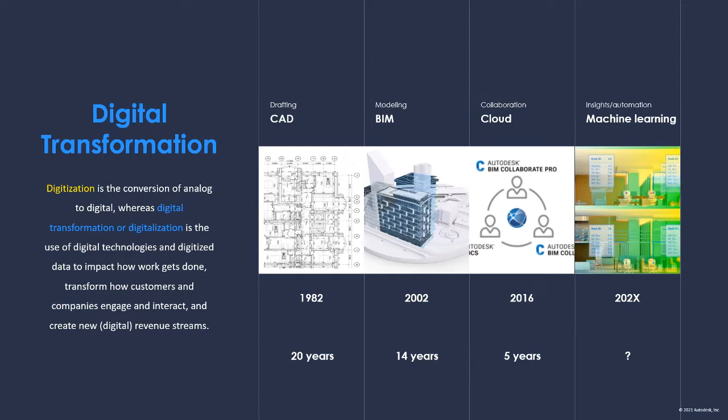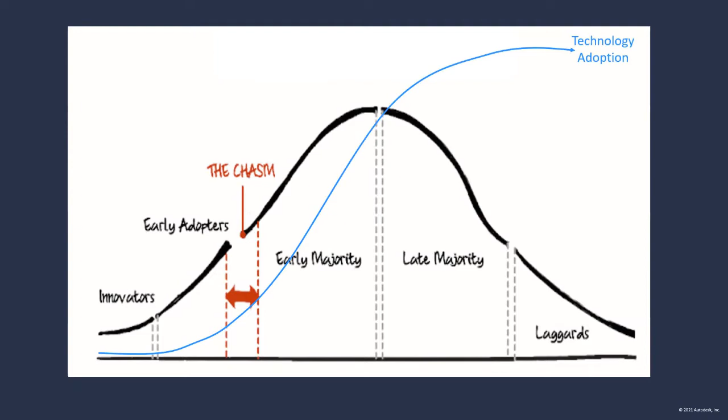You can see the blue chart that represents that curve. First, the technology is introduced, then there is a catalyst, and then it accelerates until it reaches a plateau of productivity. And this plateau, we've experienced it a few times, as I talked about.

And the catalysts were different. For CAD, the catalyst for the acceleration was personal computers. For BIM, the catalyst was really 2 things: downturn, because what happened in the years 2008, 2009, 25% of the AEC industry was out of work. So during that time, a lot of professionals learned BIM and started to use it after the recession when things were better. But also with mandates - public and private owners, so governments and private owners, started to mandate the use of BIM. They said, I want a BIM project. And the goal at the time was really to be on time and on budget.

For the third digital transformation, which is the cloud, no surprise here - the cloud was accelerated by COVID. COVID was the catalyst for this complete transformation. Today I can tell you from what I see with the Autodesk products, there's a very large majority of the industry that transitioned to the cloud.

The other interesting thing is if you look at the duration of these transformations, the first one took 20 years, then the second one 14 years, then 6 years, because we can say that we already transitioned. So there's also an acceleration of when these transformations happen.

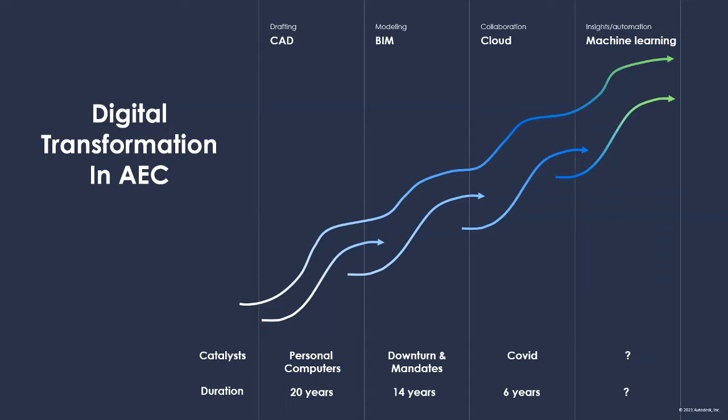The other nice thing about the transformations in AEC is that they build on top of each other. CAD is still a big part of the BIM process, and you cannot do cloud collaboration without BIM. The next transformation that will be about getting better insights and automation will need data, and the data will be created with BIM, with CAD, and it's going to be shared with the cloud. So it's interesting that you see that the value builds as we go through multiple transformations in the AEC industry.

So the question is, what will be the next disruption? When will it start? And who's going to be the driver or catalyst of this transformation in AEC? It's a lot of questions, and I don't have a crystal ball, but I can share with you some of what we think at Autodesk about this next transformation.

So in order to understand what the next catalyst is, we need to look at the bigger trends. In our industry, whether you design and build a building, a plant, a bridge, or a road, there are two big categories of drivers. The first one is demand. And globally, the demand will just be enormous in the next several decades.

It's driven by urbanization. Even though COVID slowed down people moving to cities, the longer term trend remains solid. A lot of the population will move to cities, reaching close to 70% of the population living in cities by 2050. The population is also growing from 7.5 billion to 10 billion by 2050.

And then there's post-COVID. We need to reconfigure the entire built environment. We need to make it safer. We need to be proactive in case there's another pandemic in the future. And the number of natural disasters keeps increasing, so there's more flooding, more earthquakes, more fire. All of that is going to create demand to build or reconfigure the existing built environment.

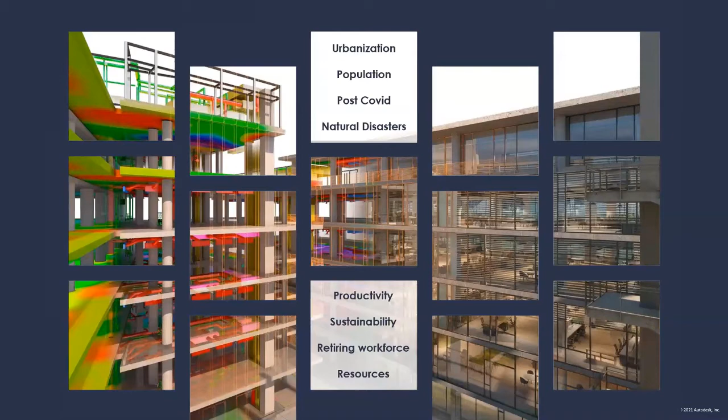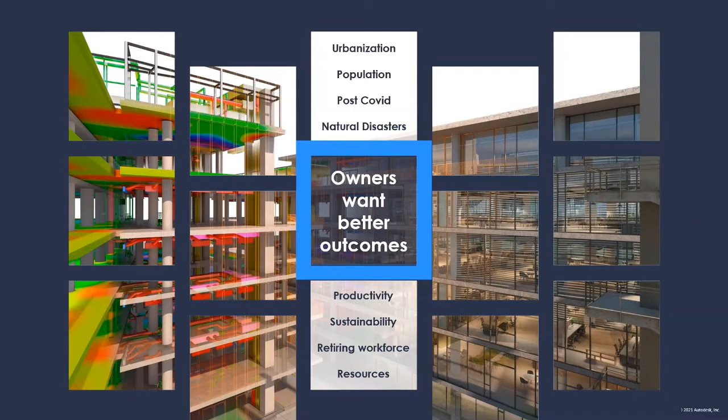So when you look at all of these forces, they will be a catalyst of change. To me, what's going to drive the next transformation is owners—whether public owners like governments, or private owners—they will want better outcomes because the demand will be big and we need to do better, be more productive, and design and build assets that perform in a much better way.

And we started to see it. We started to see governments around the world mandating the use of BIM. In the US, for instance, the GSA is already requiring BIM for facility management. The Internet of Things is exploding with billions and billions of data points, and owners are now part of some of the top trends in terms of smart spaces and smart buildings. All of that is just going to accelerate the next digital transformation.

Because the total cost of ownership for an owner is really in the operation phase—it's post-construction. 70% of the cost of ownership happens post-construction. So the way owners think about the lifecycle is around the design, the construction, which is the capital project phase, but also the operations.

What they will want in the future is to monitor what's happening during the operation phase and use all of these insights for planning purposes, to either reconfigure existing assets or build new ones. They want to learn from the past or existing assets in order to better design new facilities and new assets. So that white part of the lifecycle becomes critical for owners, and that part will drive the transformation.

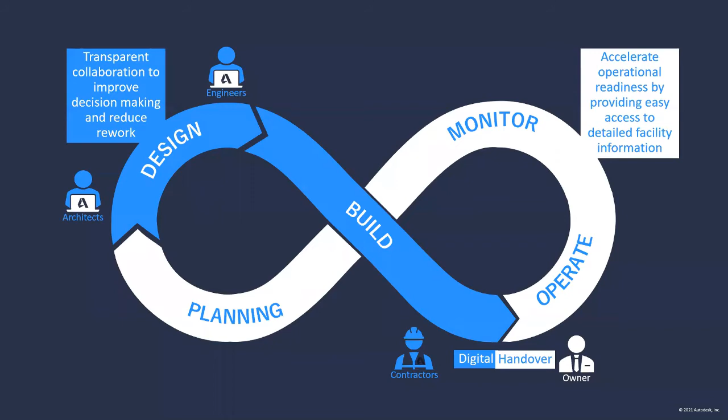So what is a digital twin? A digital twin is a digital replica of a built asset - a dynamic digital reflection of its physical self. Digital twins possess the operational and behavioral awareness necessary to simulate, predict, and inform decisions based on real-world conditions. I'm going to show you some examples of that.

At Autodesk University, we announced Autodesk Tandem, a new solution currently in beta. Autodesk Tandem is a digital hub that integrates with new and existing systems to connect the digital model to the operational and performance data of its physical counterpart. It's a powerful tool that integrates the rich information created during design and construction and transforms it into a holistic view of the project.

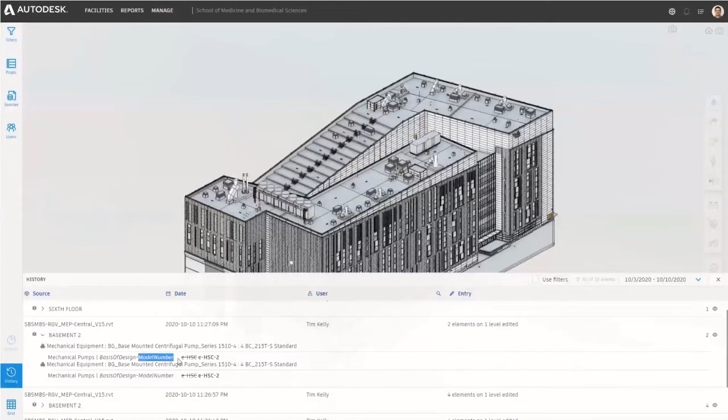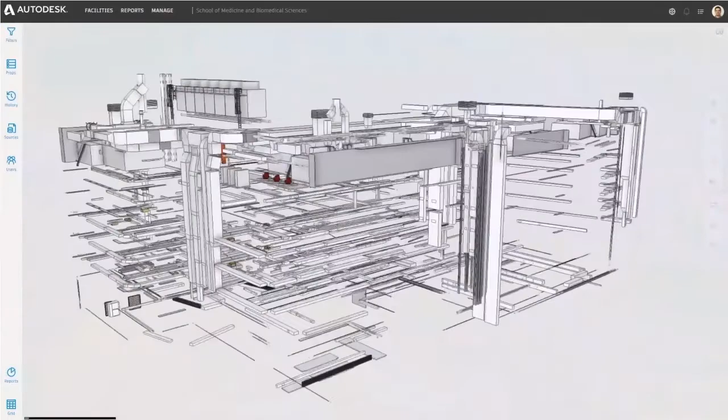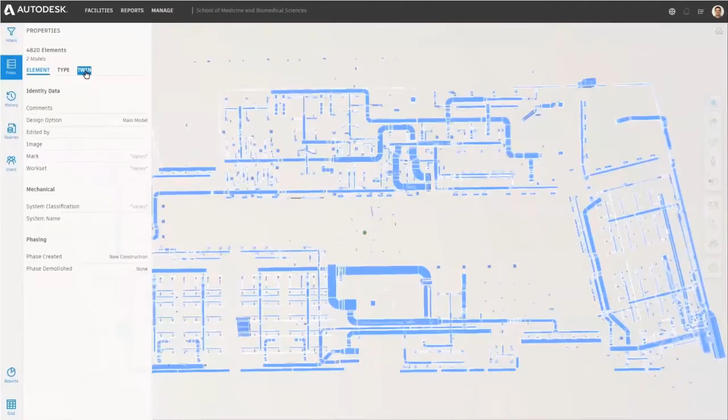Here you're seeing a science and biomedical research facility on a university campus. Over the course of design and construction, a project like this generates millions of data points - from defining space use like labs, classroom organization, and window configuration, to supporting systems like structural and MEP, and down to specific elements like an air handling unit. A unit like this may have thousands of pieces of information associated with it, and that's just one unit. Imagine all the elements in this facility and all the data associated with them.

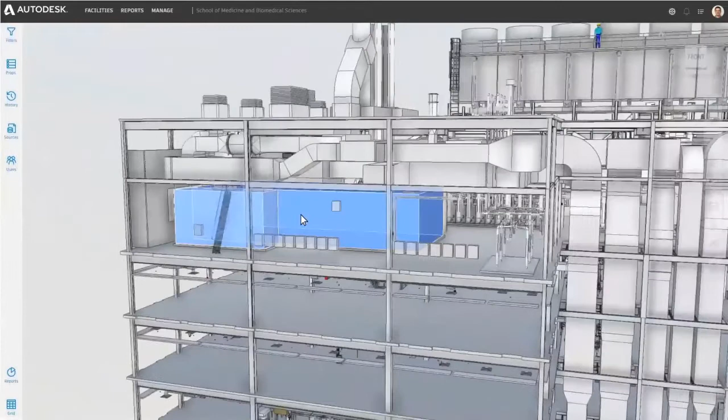Tandem captures this vast amount of valuable digital information and places it at your fingertips in an organized, structured way that tells a story about the data. Tandem provides context. When it launches, it will support a broad set of information captured during design and construction, including all Revit models, IFC data, and construction as-built data.

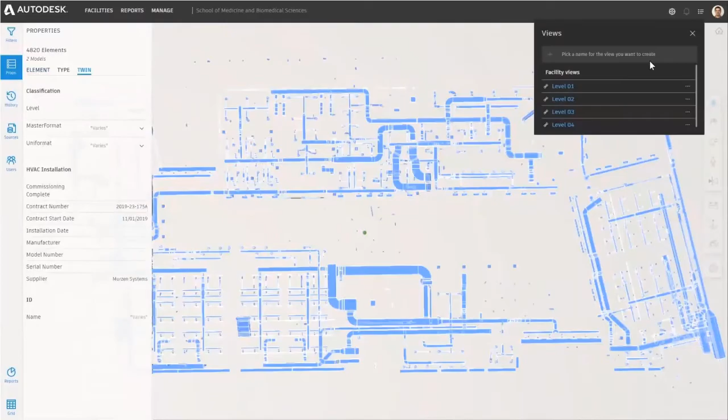Post-handover, Autodesk Tandem becomes a digital hub integrating with new and existing systems to connect the digital twin to the operational and performance data of its physical counterpart. One thing is clear: there is no single source of truth. However, by connecting to operational systems, we can create an ecosystem that provides a cohesive digital twin solution.

Okay, point one was around digital twins. Now let's talk about insights, specifically during the operations phase. The operation phase is really about monitoring all of the data during operations.

Here you can see an image of visualizing sensor data on a BIM model. What's important in terms of monitoring sensor data is to represent it on a 3D model, because there are thousands of sensors inside the building.

It's about understanding live data, but also data that happened in the past, so having a time history database. The third thing is to look at all the sensors in a common visualization standard, because you get sensors from different providers, each with different visualization tools. What's important is to normalize the visualization of any kind of sensor in the same environment, because you cannot look at 5 or 6 or 10 different systems.

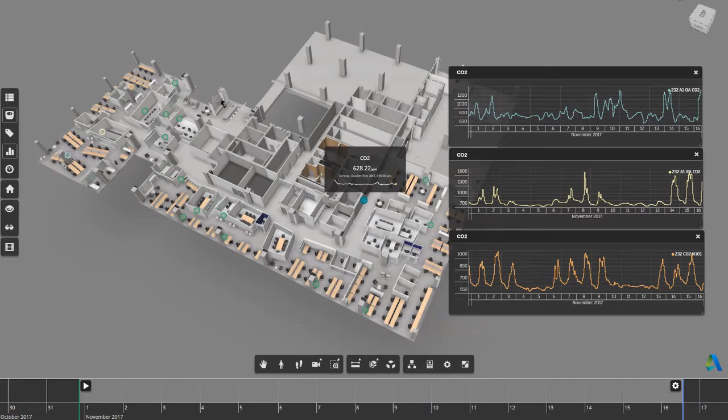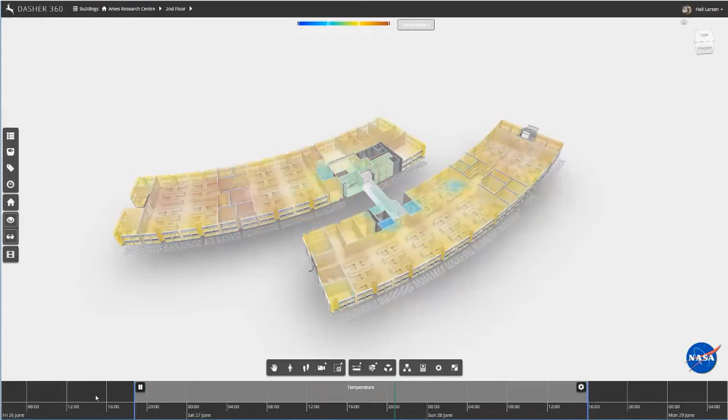Here's an example of sensor data implemented years ago on one of NASA's buildings. You can see the variation of temperature over time in this building. When the temperature becomes red, it means the rooms are hot, and when it's blue, it means the rooms are cold. An owner or operator of this facility can understand dynamically, in real time, the temperature in the facility, and can optimize in the short term for energy performance, but also use this information for the design of the next building. So it's one way of capturing insights from the asset.

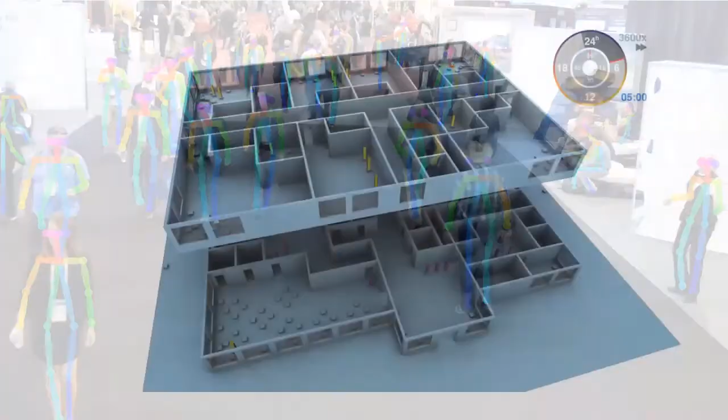Another way to capture insights is about the occupants of the building. Moving forward, it's important to track the behavior of people. Here you can see, on this research project, how we can create a digital twin of the occupants. We use stick figures for the people to keep privacy and get data that's anonymized for consumption. Once you start capturing data, you can start visualizing it in different ways.

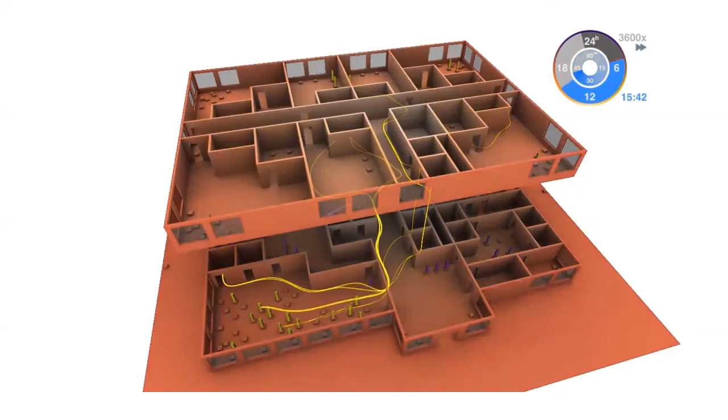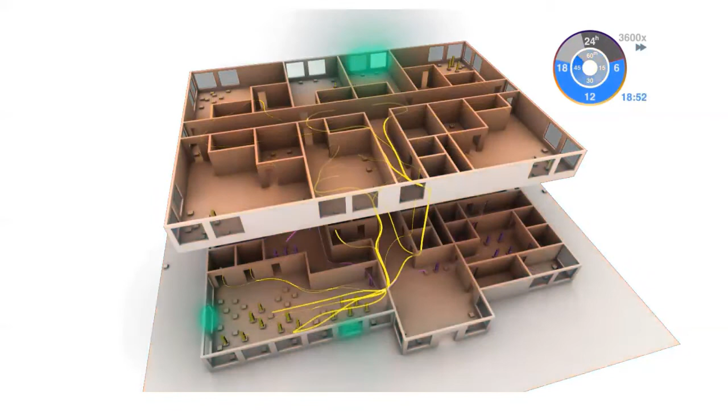What you can see here is how people consume the building over time. In this animation we see time, we see differences in temperature, and we see the behavior of people based on temperature. For instance, if you're an architect and you think people should go in one part of the building — let's say it's a retail store — but you see they go the other way around, you can start understanding why the behavior is like that, since you didn't intend that behavior. You can also capture the behavior of people and use it downstream for other facilities. I'll show you an example of that.

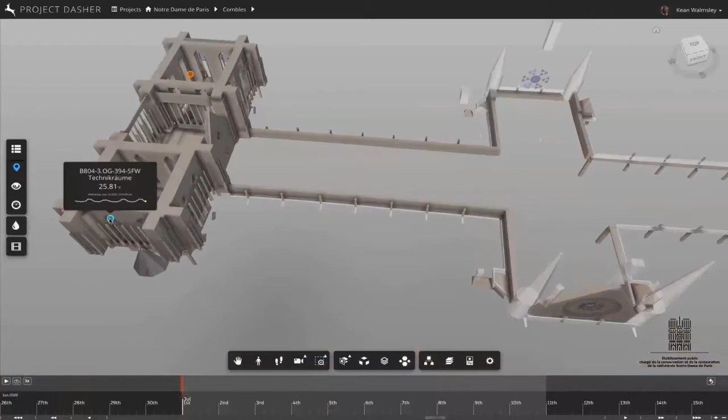This last example is really exciting: Notre Dame. Autodesk is one of the companies providing BIM models, information, and solutions to support the reconstruction of Notre Dame. Being from France, I've been quite involved with the project and supporting the team working on it. As you know, the roof of Notre Dame collapsed because of fire.

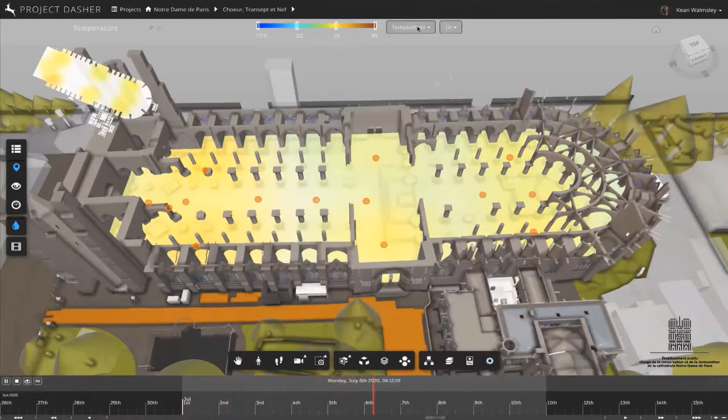So understanding temperature in the future will be important, and the owner of Notre Dame is looking at putting sensors in place to understand what's going on and predict if there's another fire or disaster. It's been interesting working with the team on the design and construction of Notre Dame to see how they're embracing these new technologies. Given the age of the cathedral, it's a pretty significant digital transformation, because the way it was built and operated was pretty old in their process. So using the latest and greatest for that in the future will be fascinating to see.

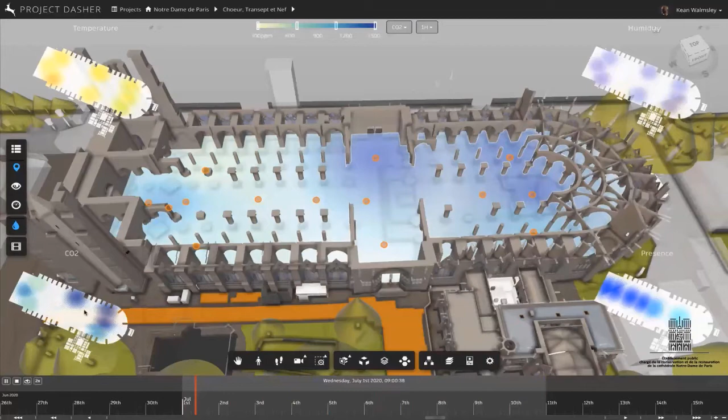The last part I want to talk about is automation. Automation could be introduced for operations and monitoring in buildings, but I'm going to focus on its impact on design and planning.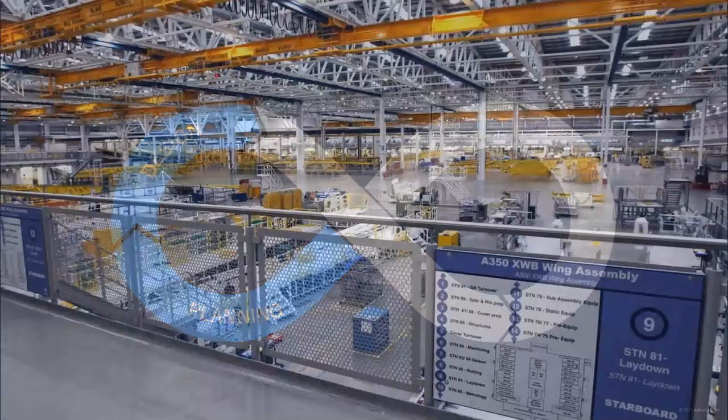For this example, I'm going to talk about Airbus. They're building a facility for their new A350, and that part is really where they build the wings. As you can imagine, this building is pretty large because wings are pretty large, and typically a plane has 2 wings, so they need to build 2 at the same time.

At Autodesk, our research team has been working with Airbus to try to optimize how people work on the wings. You'd be surprised, but there are a lot of people, and they need to walk because the wings are pretty long. They need to walk, they need to go and get their tools, and there's a lot of walking involved. Sometimes it's miles and miles every day just to get tools and things like that. So it's something Airbus wanted to improve.

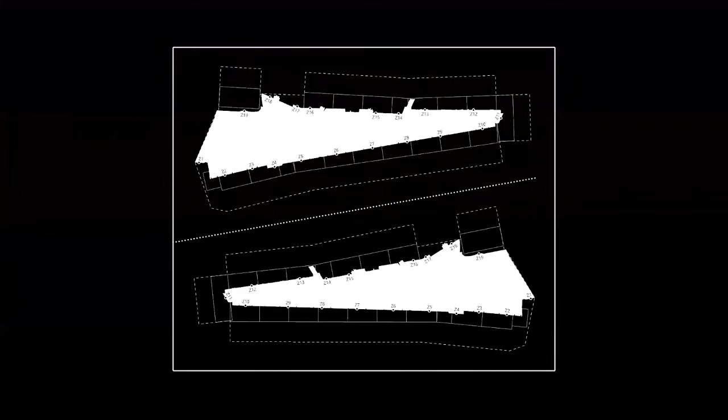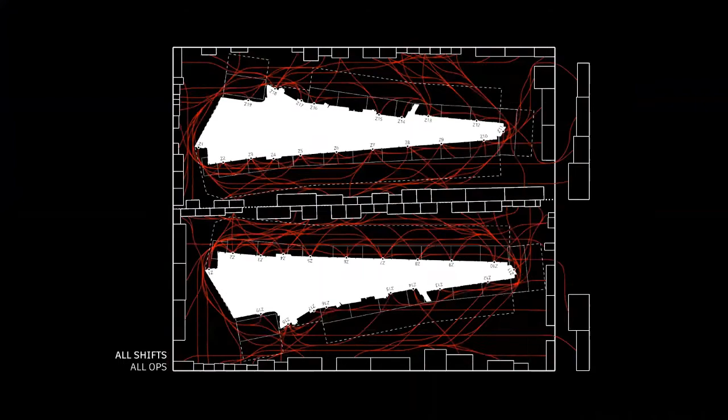So we worked with them and modeled how people are walking from one place to another, sometimes to get specific tools, specific materials, specific paint, and other things. Once it's modeled, we can iterate and use machine learning to simulate multiple types of options to optimize around the least walking possible. Through this process, we identified thousands, even millions of options, and could pick from them.

So Airbus was really interested in the process of using generative design for the space layout, and they asked us to work on their new facility.

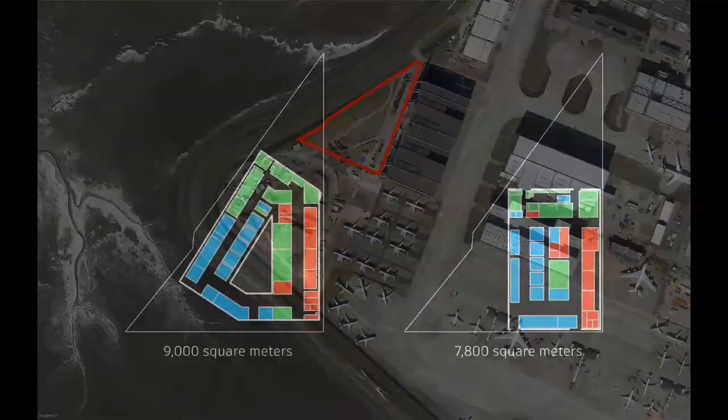Airbus was interested in doing a research project with us on a new facility, and you can see the lot from this aerial view. The lot is a triangle, so it's never easy to design a building that fits a triangle, and multiple options were possible. It could be a 9,000 square meter design using the shape of the triangle, or something smaller but more traditional and rectangular.

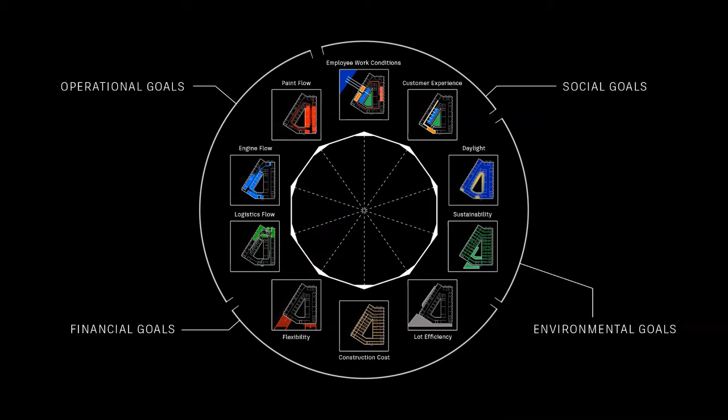So we explored these two strategies and worked with Airbus to identify the specific operational goals for this research project. The goals were around engine flow, logistics, and flexibility, but you can group them into operational goals, social goals, environmental, and financial. We didn't know which one we would optimize for, because you can optimize for one or two, but it's really hard to optimize for all four.

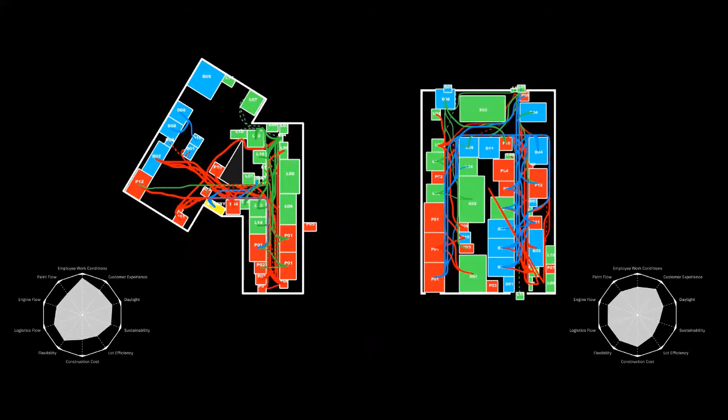So the same way, we use generative design to explore many options. On the spider webs on the side, you can see the impact of each of these solutions. Just like we explored a large number of options for the wing project, here we explored just as many options, and now the question was about trade-offs.

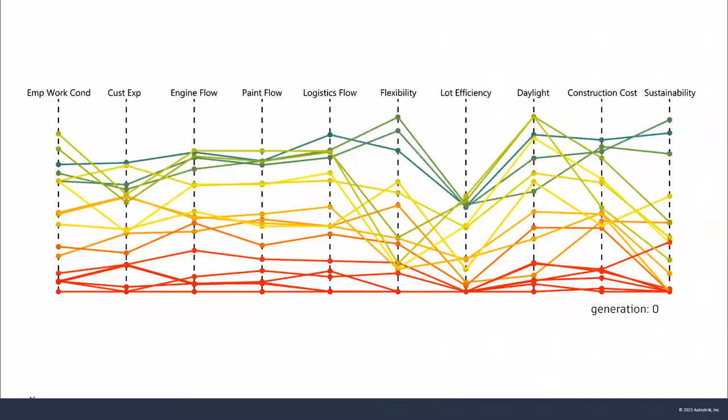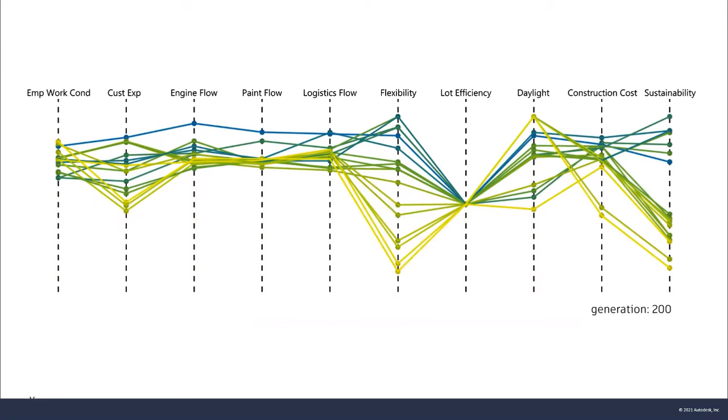You can see the generative design system learning over time and how to achieve better scores, with each zigzag line representing a design option. Lines higher on the graph are scoring better. So it was really a good tool to explore the trade-offs to pick the right facility.

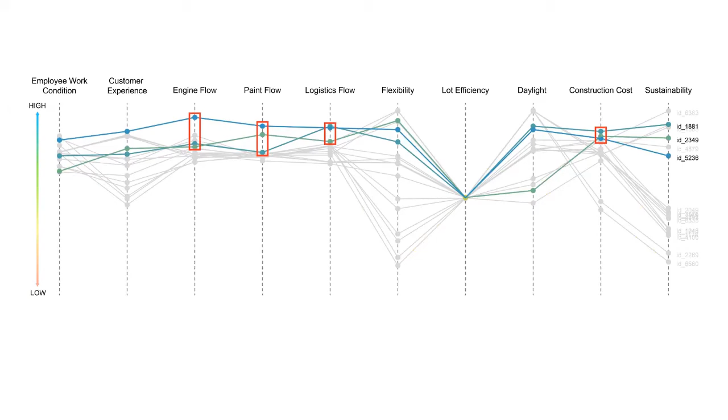The key criteria that Airbus ended up choosing were construction cost, for sure, but also engine, paint, and logistic flow. So it's a good example of using machine learning and generative design to really explore a large number of options before going into more detailed design, so you can understand the financial and environmental performance impact of the facility.

And you can see the final design. That was great daylight, renewable materials, and net zero concrete as well.

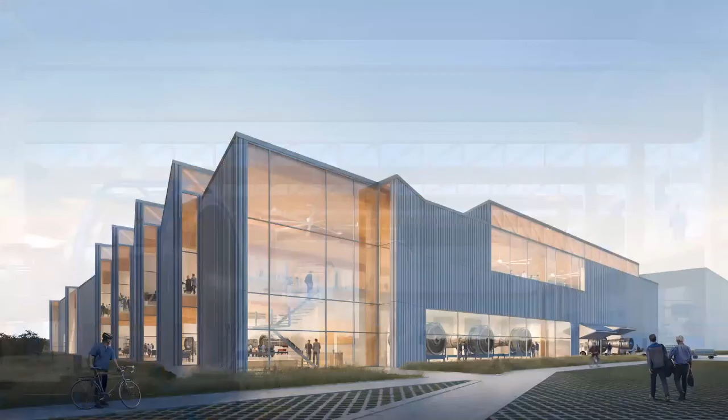That project with Airbus is exciting, but it was a one-off. It was custom software. What we did, we also announced at Autodesk University back in November, was the acquisition of this technology called SpaceMaker. SpaceMaker is really generative design at scale. So everything you saw with Airbus, the goal is to scale it with SpaceMaker.

SpaceMaker is a data-driven approach, and it's going to accelerate the AEC digital transformation. The strength of SpaceMaker is artificial intelligence and machine learning. It's really a big investment in our vision for the future of design, and you're going to see a lot more from us in the months to come.

So some of the things SpaceMaker does - it looks at all kinds of analysis. What you saw with Airbus was around cost, distance, and the flow of people. But in addition, we can add all kinds of criteria based on wind, noise, daylight, or view from apartments. It's really using the power of artificial intelligence and machine learning to generate millions of different options.

Another really interesting thing - I mentioned that owners are worried about waste in construction. That's why DFMA, or Design for Manufacturing and Assembly, is a growing trend around the world. You can see, for instance, in places like the UK or Singapore, the government has started to mandate the use of modular construction.

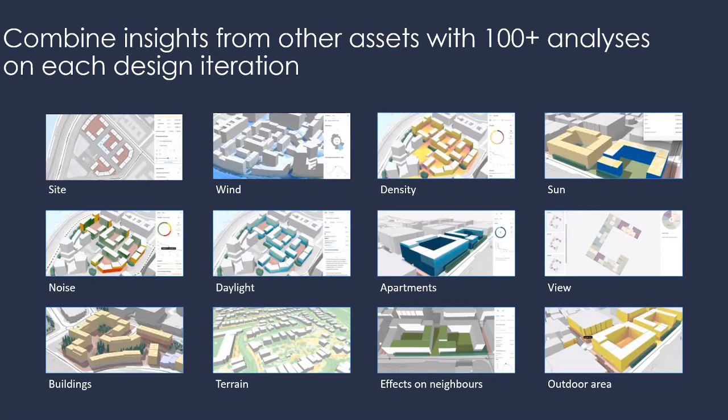But when you think about it, in the design phase, if architects and engineers design the buildings and facilities knowing they will be assembled or use prefabrication - in terms of a complete module that represents a room - then the chances of implementing it downstream in construction will be a lot higher.

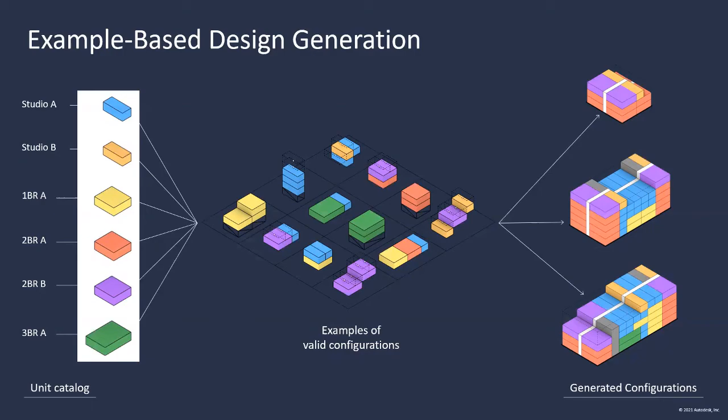So that's why generative design and the future of generative design, it's really understanding what kinds of components are at the disposal of architects and engineers during the design process. If you know that you have this type of components, and it can be a single component, it could be an assembly of multiple components, or it could be a complete room, then the software will be able to show you the different options and trade-offs. And that's something that's really exciting.

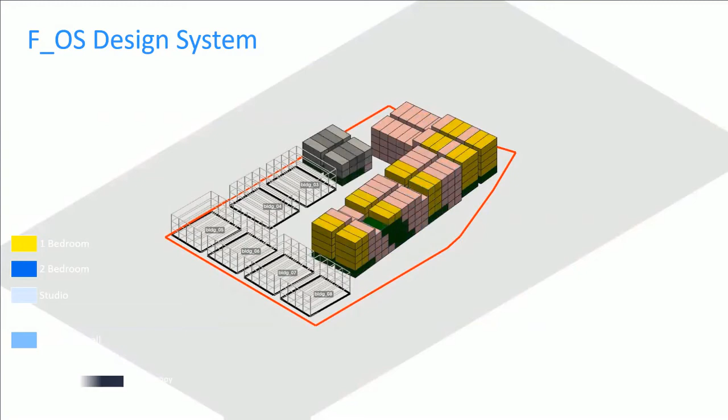We are actually researching with Factory OS, a company in San Francisco, and we are looking at using generative design to see how we can design the best facilities using that. So that's also part of the automation side of what owners want.

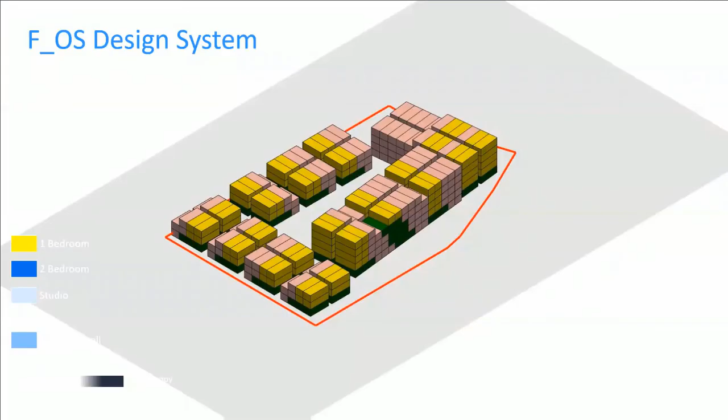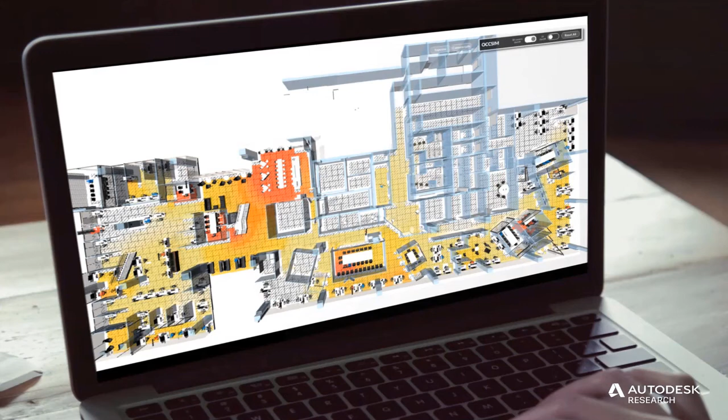And now it's my last example. It's a really cool one, and it's very timely because of COVID. In this case, it's using the entire power of artificial intelligence to try to make an effect on the reconfiguration of the existing space. So this project is also something that Autodesk Research has been doing during the pandemic. It's really a system called OCCSIM. At the heart, it's really a system that brings three things together.

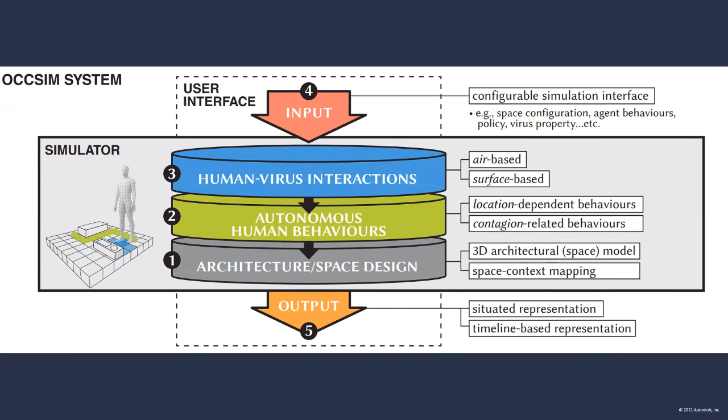First, it brings spaces, architectural space, in the form of a 3D model. It brings some of the human behavior - remember the animation that I showed you where we see people behaving in a building, that's the kind of data we can bring into the system. And the last one is more mathematical models that explain how the virus is transmitted from one person to another. When you put all of this together, you can start simulating the rate of contamination and the risks inside the facility.

So first, the first part is about the spaces. Here the research looked at two different areas: one is our office in Toronto, and the second is a restaurant in New York. All of this data has been created with a BIM tool and can be leveraged in this simulation tool. Remember, when I talked about digital twin, I said a digital twin enables you to simulate, to predict, and to inform. So here we are looking at the simulation and predict side of it.

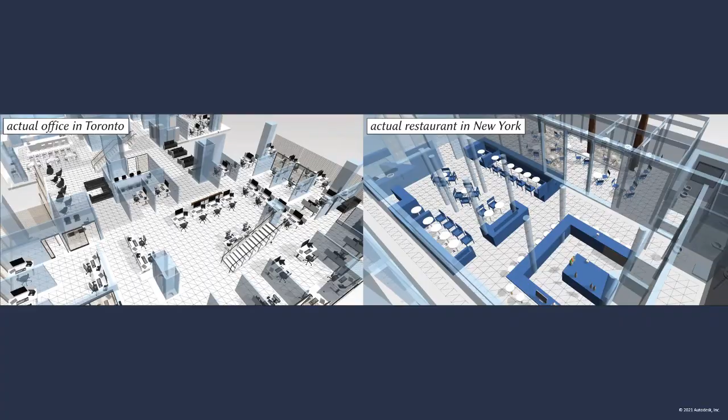Number one, the space. Number two, it's the behavior of people. So we looked at how people circulate in a facility, and here it's captured for different personas - the customers of a restaurant, the bar manager, etc. And then we can see the different behavior. This behavior could have been captured digitally like we saw, or in this case, it's input manually.

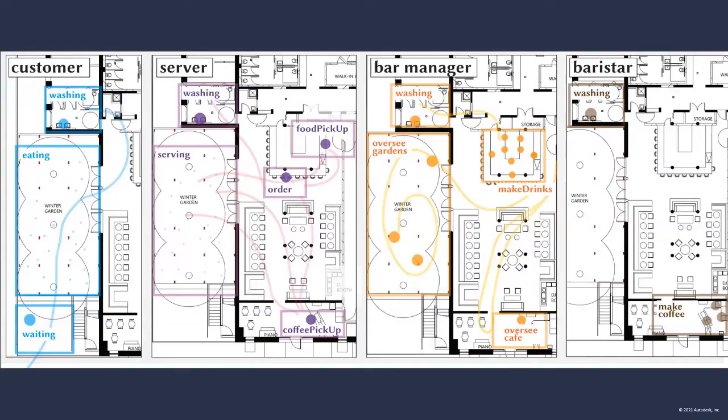And the last one is really the physics of transmission. We know the virus can be transmitted in two different ways: airborne particulates, where the virus stays in the air - that happens when people talk to each other or when they cough. And then on top, it's really based on high-touch surfaces, so when you touch a door handle, an object, a ramp, a desk. So these are the physics and the modeling of how the virus can contaminate.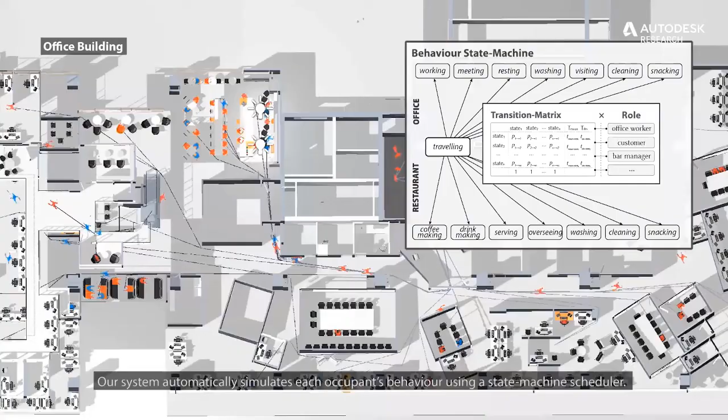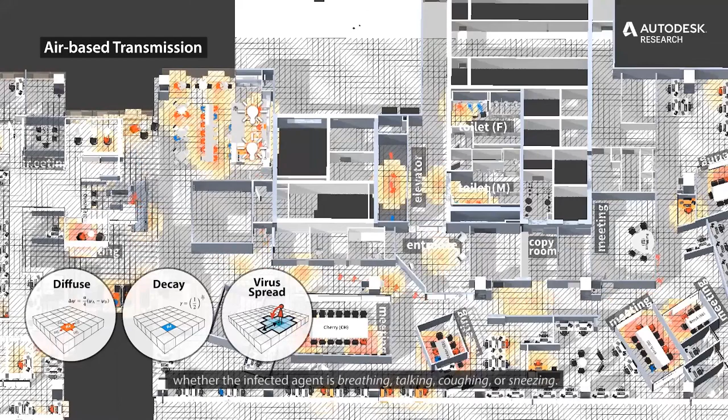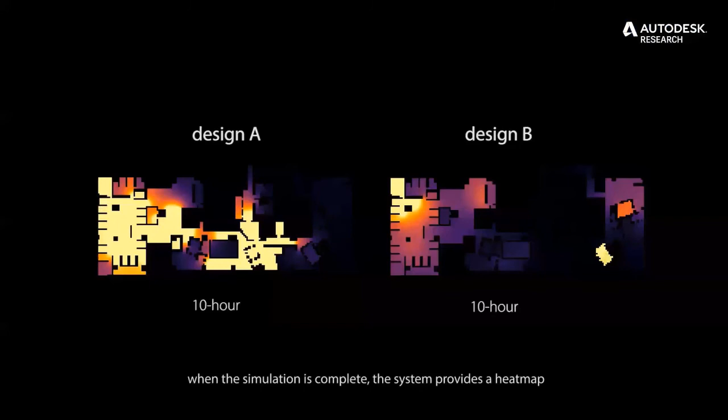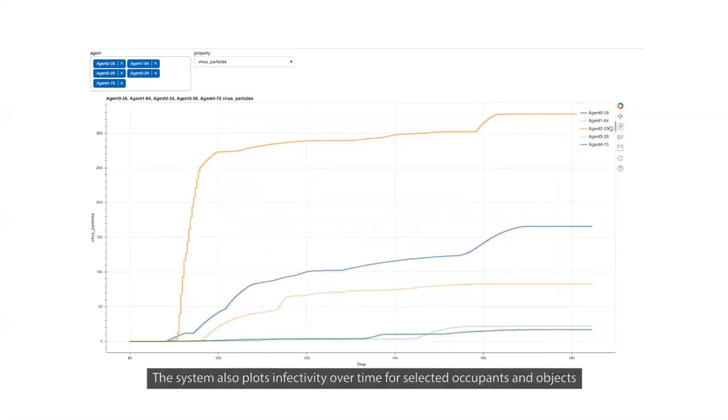And now when you put everything together in this digital twin, you can simulate what's going to happen. We have these three databases all together, and we can mesh the environment and associate different risks in each of these spaces. So when it's a closed room, the risks are higher. When it's a toilet, it's the same thing. Then you can also start understanding, based on behavior, if people are contaminating each other. Using that, you can start working with your customers, looking at the best synergies to optimize the design based on the risk that occupants will take by being there. So that's another example of using insight and automation to drive the right outcome for your customers.